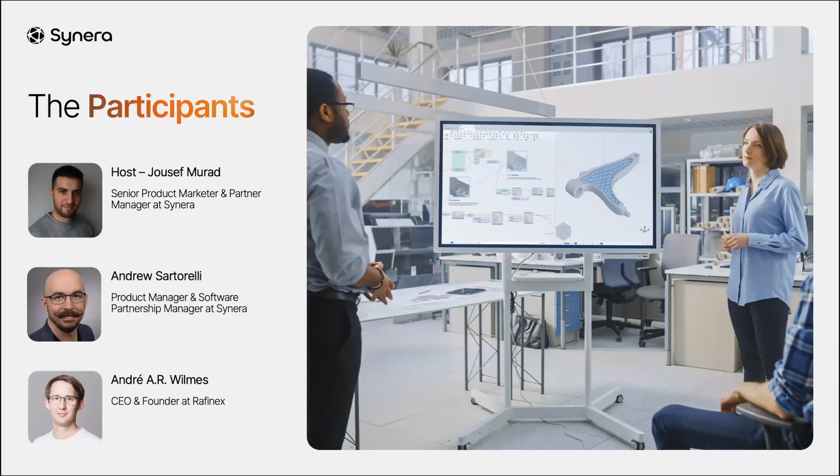All right, a little bit about Synera and how product development processes have been done in the past. So for hundreds of years, engineers focused on developing parts and accepted the fact that they need to invest their manual work and labor in form of money of the company in the development of every single part. And this happened repeatedly. With every new generation of a part, engineers start development again, basically from scratch. This was true in the past when we engineers used pencils to draw on papers, and this is still true today when engineers use, for example, CAD and FEM systems to digitally, quote unquote, draw or create a digital file. The tools evolved, however, the working principles did not.

In the future that we see with Synera, and even today, we see that engineers can and will stop developing the part and will start developing the process. This saves an enormous amount of resources because we engineers can recycle the process in case boundary conditions or other requirements change. Our vision is to focus on the connection between invested manual work and created value, which ultimately translates into ROI, such as saved time and money. Simply said, in our world, engineers accept the fact that they create things which drastically lose value over time, and at the same time, they accept the fact that mistakes are made more than once.

And that very moment when engineers start to create the process itself, they create value, which will survive over time. Even more, every time a new engineer opens a workflow in Synera and works on it, new ideas are added. Thus, more efficiency is added on top. Processes are stored, saved, and remain accessible to every new user of the workflow, which makes communication and collaboration much more accessible and seamless than ever before.

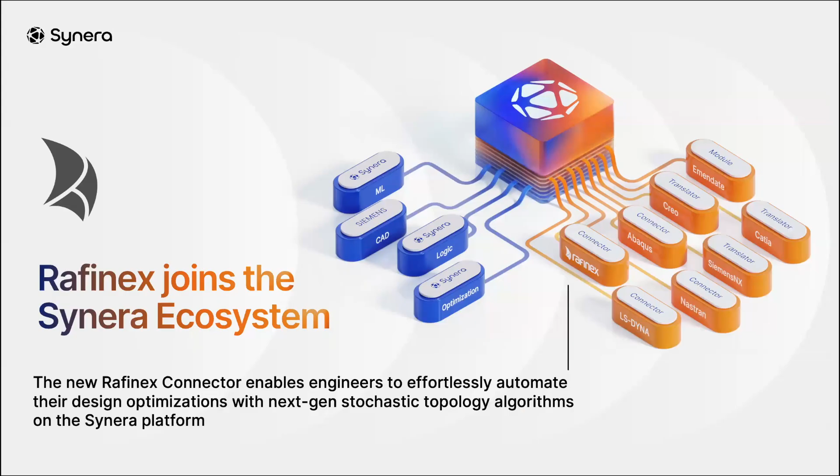Thanks, Jousef. One of the pleasures being the software partnership manager here at Synera is being able to announce the partnership between Synera and today Rafinex. There's been a lot of hard work on both sides going into creating this connection between our two softwares to really enable engineers to effortlessly automate their design and automation processes with the help of next generation stochastic topology optimization algorithms, thanks to Rafinex. I'm going to get a chance in a few minutes to share with everyone a quick demo of the workflow that's possible now thanks to this connection.

But first, I'm going to let Andre, the founder of Rafinex, share a bit about the strength of this technology and how it's solving problems in the automotive space today. Indeed, thanks, Andrew. I can only echo the pleasure it's been. Not only are we breaking ground here on CAE technology, but also on computer and software integration. So it's been quite a pleasure to work together.

Now, before we jump into the meat of things, a few words maybe on who Rafinex is. Some of you may have heard of us, some of you may not have so far. So Rafinex is really an algorithm development company that's specialized in advanced optimization algorithms with a core know-how in uncertainty quantification. So in and around how do we make CAE tools more realistic, more reflective of the real world, and also being able to compute business risk for the end users and the end customers.

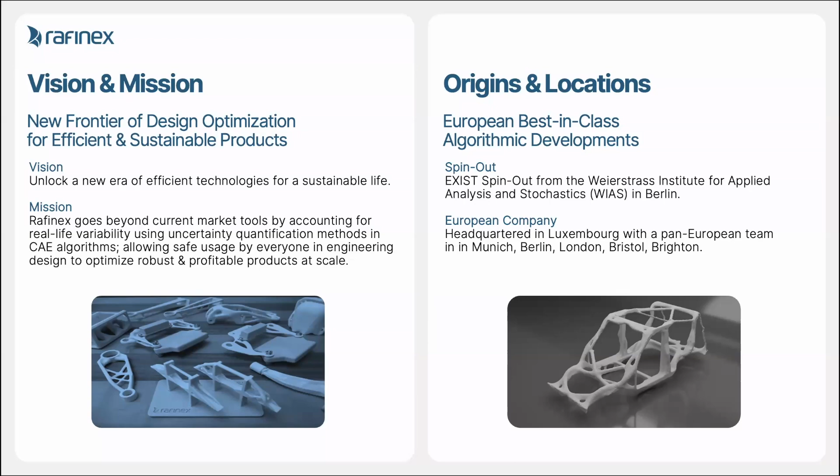So fundamentally, the problem Rafinex is tackling with stochastic or robust design optimization is over-engineering. The cost of bad design. People spend millions in process manufacturing, technology, quality control on materials, all of which are valid undertakings. But if the underlying design shape, which is locked in very early in a product's life cycle, is badly chosen, quite a substantial amount of money and cost is left on the table. Estimates vary, but somewhere around 70% of a product's life cycle costs are locked in during ideation phase already.

So the ability to optimize very, very early on, even sometimes when requirements are not fully known yet, and we'll get to that in a second, is really mission critical for the future of resource efficient engineering, particularly if business models are changing more and more to manufacturers actually owning the fleet of their products after they've been manufactured. And then suffice to say, with the recent energy and material cost problems and geopolitical implications, this problem has just become much, much more acute.

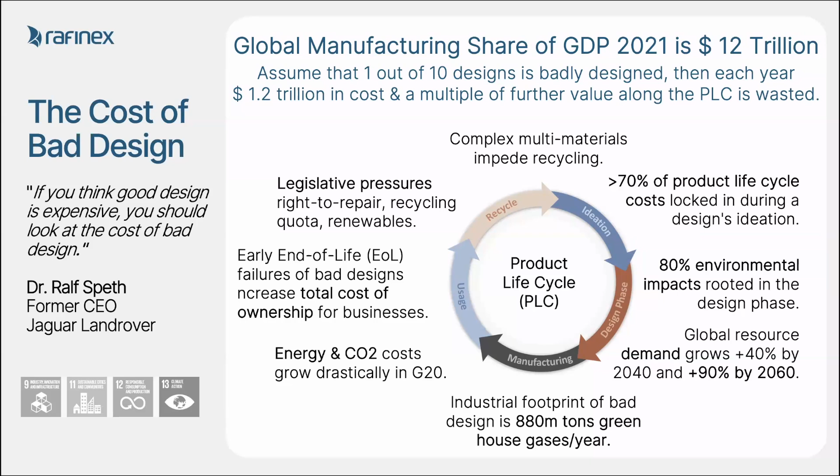So ultimately, design optimization is always a trade-off between time, money, and risk and cost. So design optimization was and has been possible in the past, but the question was always how much human resource time, compute resource time am I willing to invest, and what happens to my residual risk?

Now, what we have achieved at Rafinex is that we have taken classical topology optimization and we have augmented it with real-life data, also formally known as uncertainty quantification, which makes the algorithms slightly more complicated, just as an understatement, but which also brings in the fact that now you can optimize very swiftly for formally robust parts, which are optimal under nominal conditions, but retain a certain amount of performance, safety, and reliability under off-design conditions. So that is critically important for business end-to-end cost, go-to-market speed, and managing business risk associated with the rollout of your products.

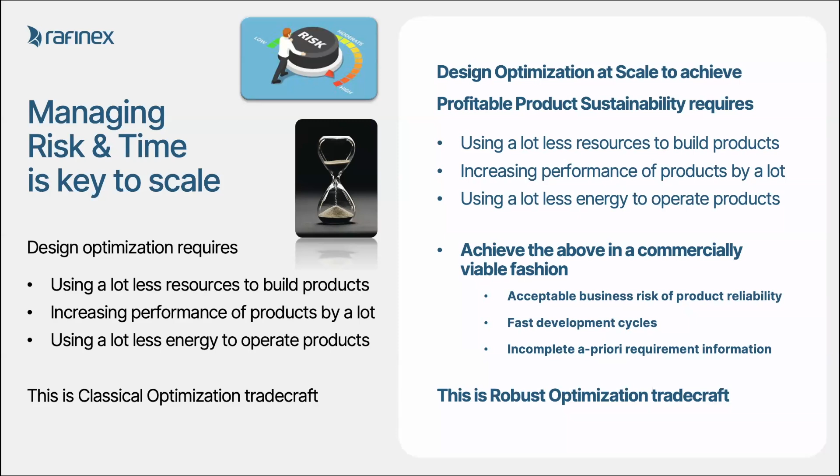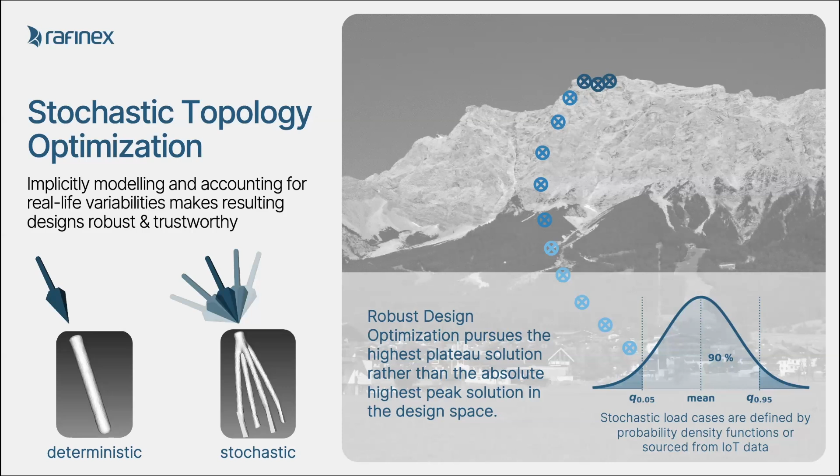For the specialists in the room, when we think about solution spaces, robust optimization aims to find the highest plateau in a solution space rather than the absolute highest peak in this mountain range. And again, the business implications are around safety and reliability of the product in service. So ultimately, this leads us under variability.

So if you optimize with variable input parameters, and these can be the loads, they can be the material properties, you find new shapes, formally robust shapes, which don't come spectacular, unfortunately. So we're not talking about coral reef looking geometries, but geometries where trained mechanical or aerospace engineers look at these parts and go, okay, ambitious, but sensible. I can understand how this part does its job.

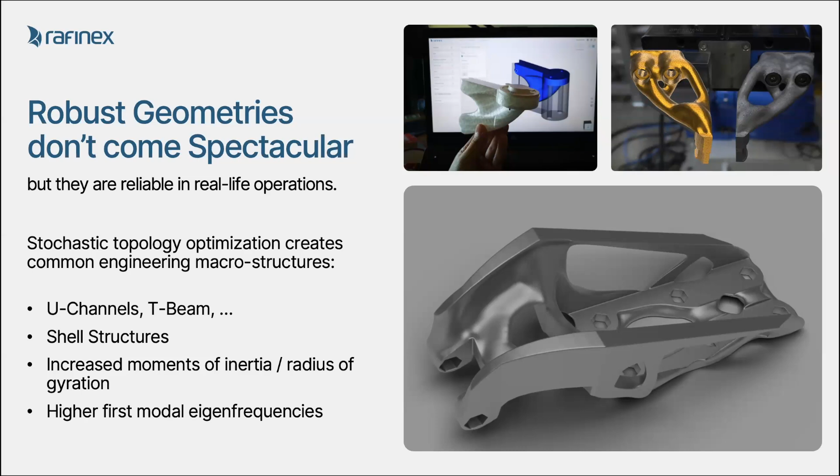So all the shapes that you see here today, none of them have been filtered, none of them have been smoothened. All of the geometries you see today are actual FEM computed and then manufactured parts. So common features in these robust geometries are U-channels, T-beams. Something that we're rather proud about is the occurrence of shell structures during topology optimization, which is rather rare with classical tools. And all of this results in geometries which typically have quite high modal frequencies and robust stiffness properties as well.

So just a word before we jump into the demo: the end-to-end workflow of the Rafinex technology starts really at the design space, so the maximum envelope that your geometry can sit in. As a first off, we do a fully automated TET10, so second order analysis on the design space. Why? It allows you to quickly learn about your problem setup, it shows you which are the worst load cases, what drives your problem setup, and it gives you the upper bounds of what is achievable. Because filling the design space with 100% material will give you the upper limit of what's achievable in terms of stiffness performance.

Subsequently, in the next step, we do a stochastic topology optimization with adaptive meshing on the fly, resulting in very high resolution, very well defined, and always continuous shapes. So we do not suffer from islands or satellite beam-looking structures sticking away. We always have a smooth surface, which we can then automatically post-process or hand over to, again, a TET10 second order stress analysis, so that we effectively get the engineer from design space to a reliable, formally robust geometry that is fully digitally validated, so that engineers can make quick, informed decisions on the basis of reliable FEA validation and analysis.

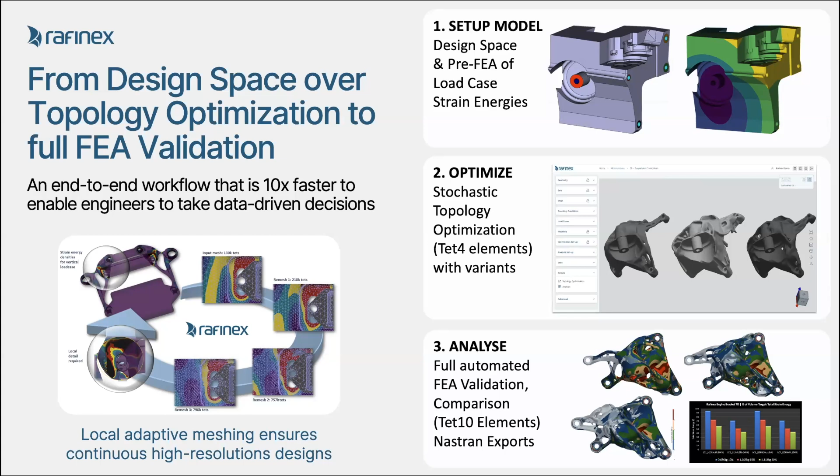So this is about 10 times faster in terms of workflow than most status quo implementations in the market. And most of this we owe to the usage of adaptive remeshing during optimization. So we've taken this technology, we spent a few years maturing it with automotive OEMs before even launching our product. So in about late 2021, we took this technology and built it into a fully fledged cloud-based CAE software tool that we labeled Möbius.

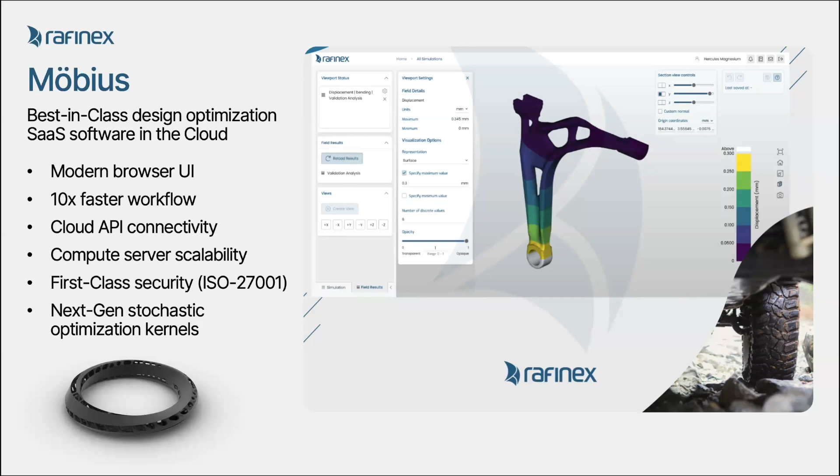So this is an API-based, cloud browser-based software that is fully secure with ISO 27001 certification, and it provides these capabilities for next-gen stochastic topology optimization to our customers, but now also to our partners such as Synera. Okay, that brings it to you, Andrew.

So it's my pleasure today to show everyone a bit of the Rafinex connector for Synera. One of the great things that we've done here is take a lot of the capabilities that exist within the Möbius product and make them accessible through Synera, directly using that cloud API to securely send all of the information between Synera and the Rafinex Möbius product.

Whether we're doing the automated optimization or design validation processes after the optimization, it's all possible now within the Synera platform. Coming soon is even the option to optimize using IoT data, thanks to our MQTT connector, which allows for sending this data back and forth, and of course the amazing stochastic loads are accessible through the Synera platform. So now I'm going to jump into Synera and give everyone a quick overview of what's possible.

So for those of you that haven't seen Synera before, here you can see the low-code environment. On the left-hand side, we have the canvas, which allows us to add and remove nodes and construct our workflows. And on the right-hand side, we have the viewport, which really enables you to interactively view those results from your visual programming workflows. In this case here, starting out on the left-hand side, we can actually see some of the new nodes that come thanks to the Rafinex add-in.

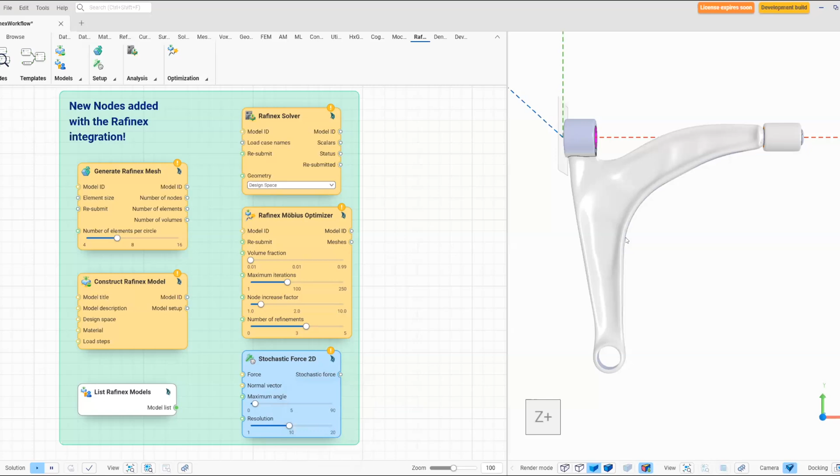But let's see this in action. So you can actually see on the right-hand side, I've got the part that I've already optimized here. We can see this nice structure, and let's see how we got there. So like most workflows inside Synera, this one starts out by importing some geometry. In this case, we're directly importing a parasolid file. Synera has access to a lot of the leading CAD kernels and translators there. So whatever CAD tool you're using, we're going to be able to bring in some of that geometry.

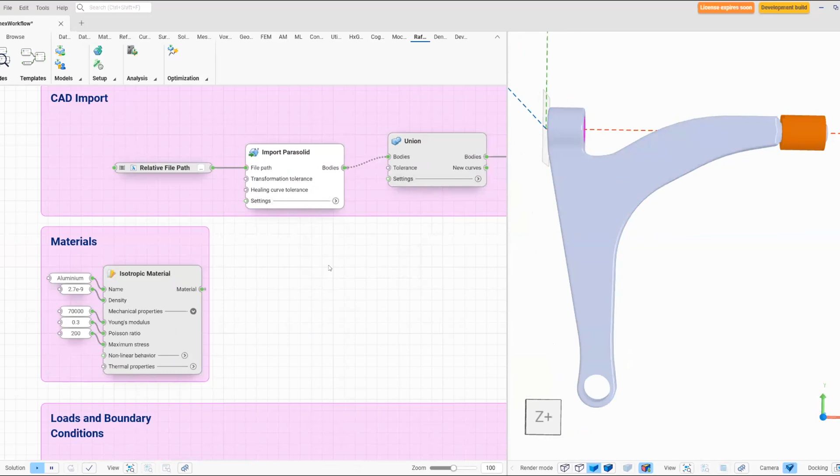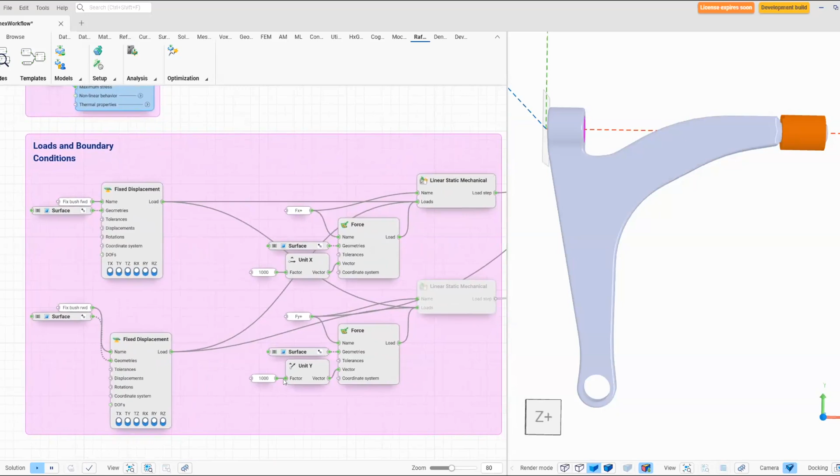I also need to bring in a few other items from outside tools. So we're going to, in this case, take in our isotropic material. We've just entered the values that we wanted here. And we also have some loads and boundary conditions that we've set up. Of course, doing an optimization process, doing finite element analysis, we need our loads and boundary conditions. And here you can see in the visual environment, we've set up some different loads that are going to be applied to our component here.

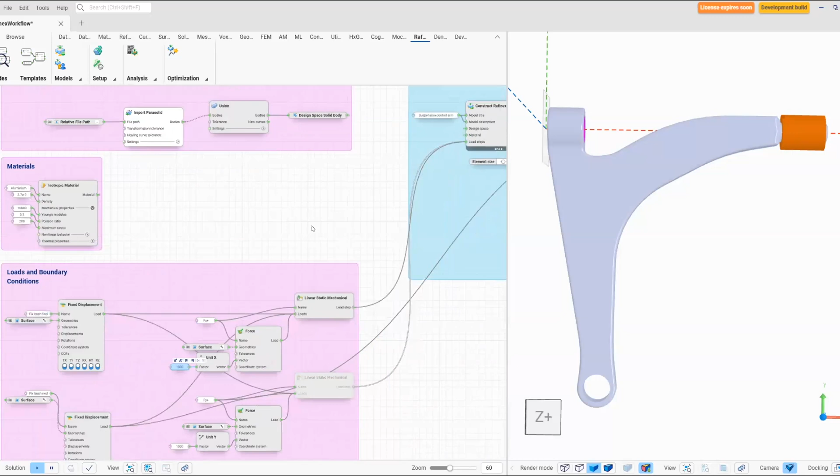Now, in this case, these are fixed loads that we've specified here, but in the future, you can imagine we can actually replace some of these inputs thanks to our connection to MQTT and read in some of that nice IoT data. Now, once we've set up our loads and boundary conditions, we're going to go ahead and start to construct our model. In this case, we can now see the model that's been uploaded to the Rafinex servers. We can see the different surfaces there where we've applied different loads and boundary conditions colorized differently.

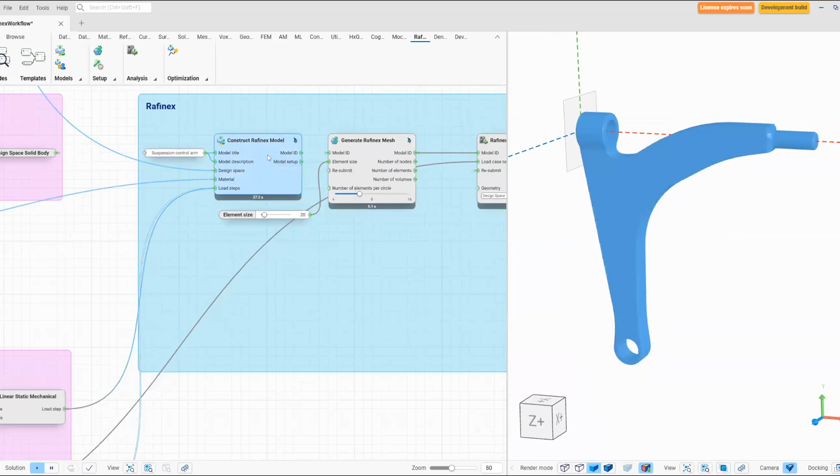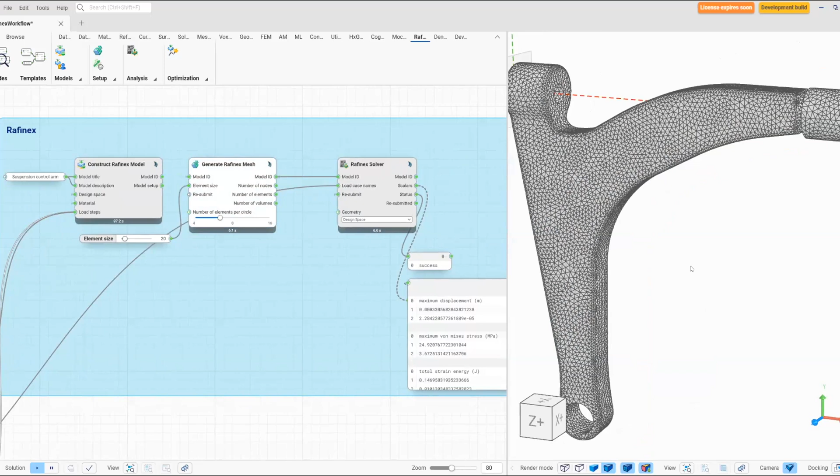The next step in any optimization or analysis process is going to be generating a mesh. So we can see here this really nice full tet mesh that we've generated, again, fully on the cloud without leaving Rafinex servers. And the first step in our process, before we even get to the stage of optimizing this part, we want to understand the performance of it to start with. And so we're going to take advantage of that built-in validation solver where we've selected, okay, we're going to run this analysis on our initial design space.

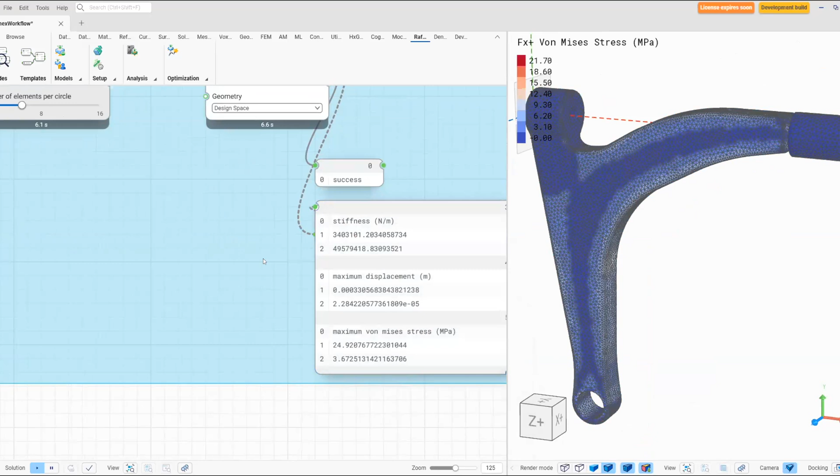You can see we get out some information about the maximum displacement, von Mises stress. We could even scroll up a little bit here and see the stiffness of the part for different load cases. It's going to be really useful when we go back and look at the optimized part and want to compare the results that we've generated.

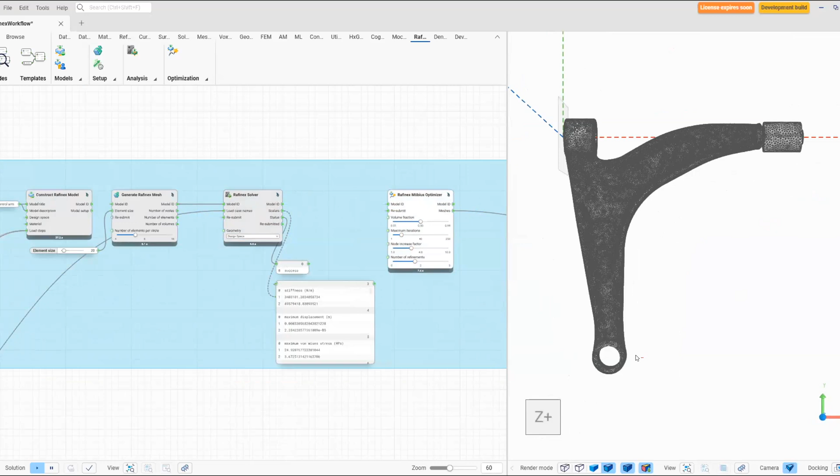So the next step in the process is we're going to actually run the optimization. And now we can see this nice geometry that we've got back, really smooth results. I have to say, I've been working in the engineering software space for a while, and these are really nice results coming out of topology optimization here. So kudos to Andre and team.

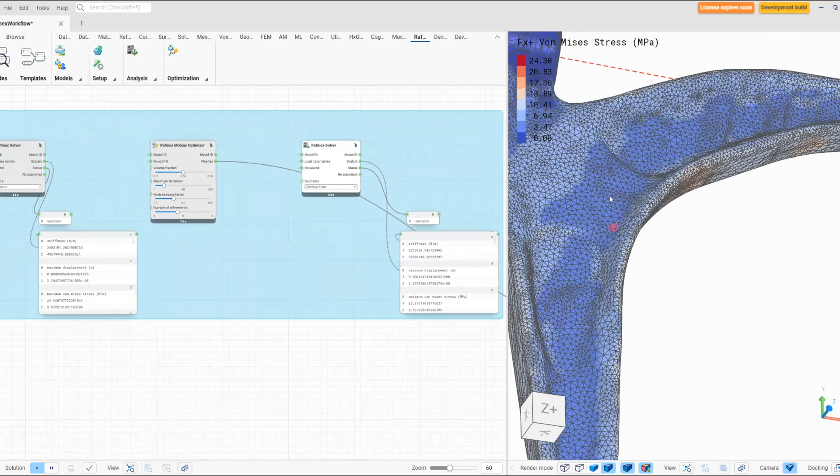And of course, the next step here is going to be validating this geometry after we've optimized it. Now we can see the validated geometry. We've gone ahead and run a post-optimization validation here on this using the loads and boundary conditions that we'd already specified.

A really nice feature of the Rafinex solver here. And again, results stream back directly into Synera. But again, I said the nice thing here is we can actually go ahead and take a look and compare our stiffnesses before and after, thanks to this nice addition here. So we can see actually stiffness reduced in both of our load cases, but also a little bit difference on the maximum displacements here. So really a nice optimization done by Rafinex.

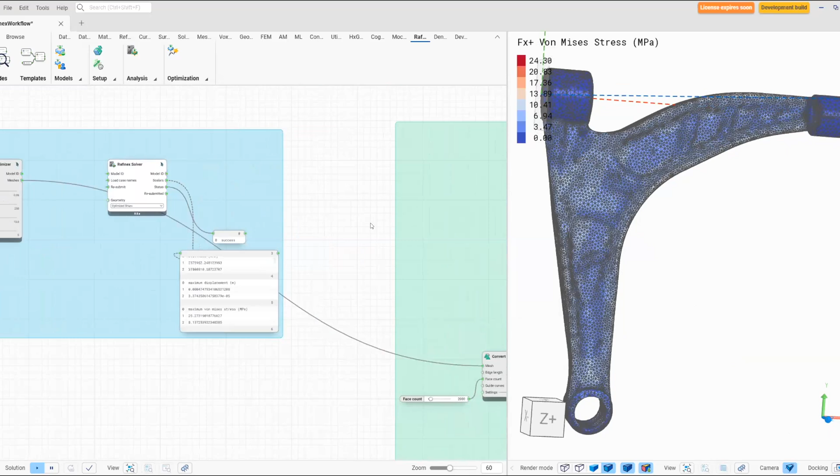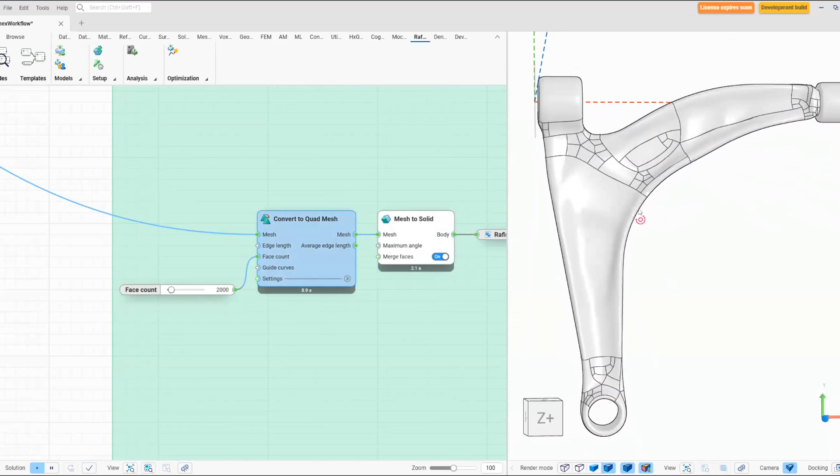Of course, once we go ahead and optimize this part, most workflows we're going to have to go ahead and actually turn this back into CAD geometry. And this is really where Synera comes into play, where we can generate a quad mesh of our part using some of the built-in algorithms for Synera. And then we're going to actually convert that quad mesh into a nice BREP geometry. Because we do have the Parasolid kernel inside Synera, we're able to do those nice BREP operations. We're going to do some Booleans to actually end up with our final geometry here.

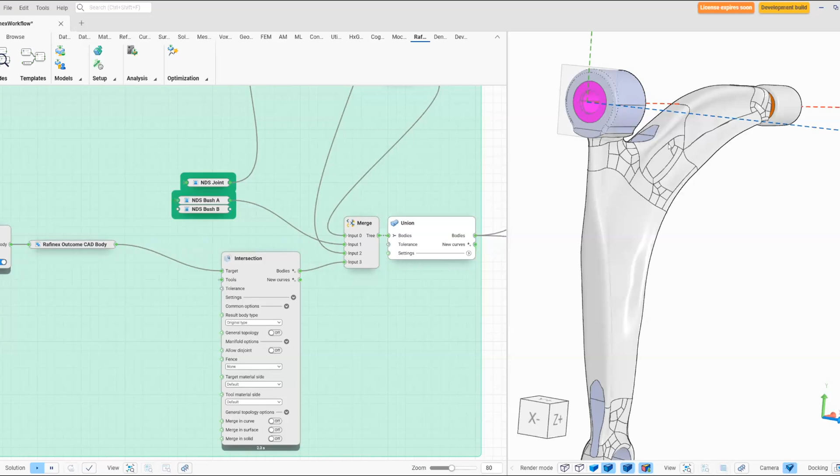And we can see we've actually been able to add back in some of those functional faces, functional surfaces that we're going to need for mating and other things. Maybe if we're doing a further multi-body simulation with this part in, we're going to need to mate those surfaces in for those contacts.

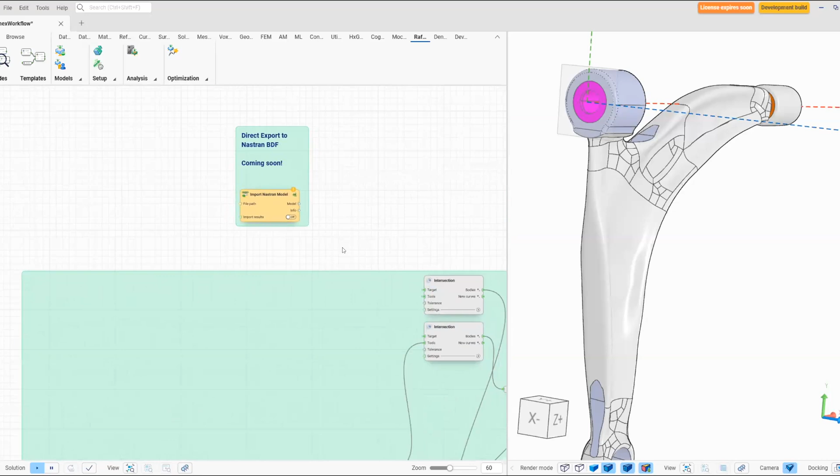Now, I've been told coming in the future here is actually going to be a direct link to export your Nastran bulk data file from Rafinex. So when we want to take this into a validation actually inside Synera, pretty soon we'll have that direct connection there to make it even easier, whether you're using Autodesk Nastran, NX Nastran, or MSC Nastran.

So now once we've got this geometry, we've got a few different things that we can do here. As I said, we could do a further finite element analysis, or we're going to jump down here and actually we're going to take a look and we're going to mesh this part and use one of the add-ins from another one of our partners, Fraunhofer IAPT, to do a costing analysis on this part.

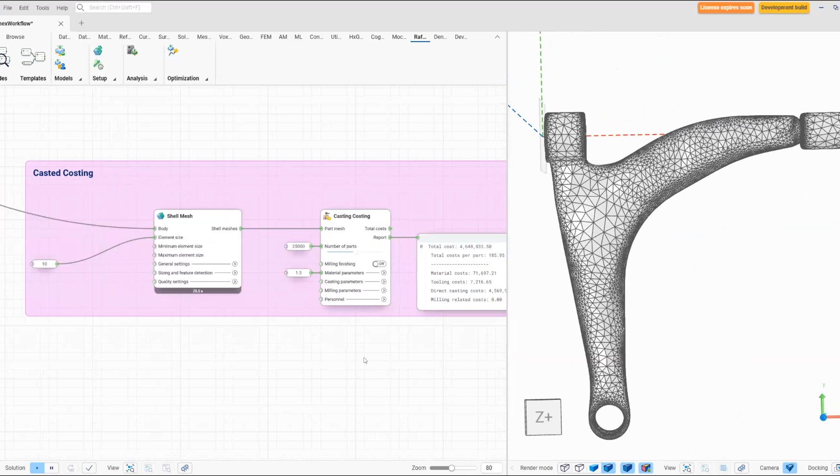So because this is a cast geometry, we can go in and say, okay, we want to have this many parts in our batch, and we're going to specify a few different material parameters where you can specify the price of the material, the density, so on. It really gets quite elaborate here, but in the end, we can actually see what is a projected cost.

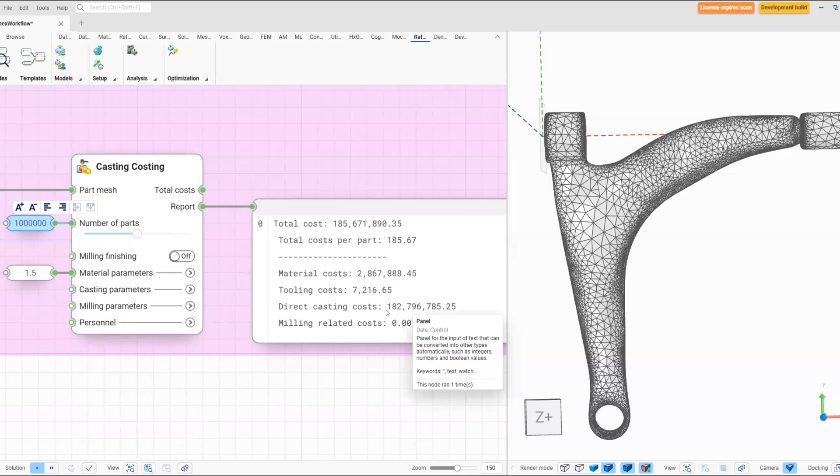So maybe if I'm going to go ahead and turn this into, I don't know, we're actually going to go into really high serialized production. We can see the total cost for this, and again, the unit price there and different costs for various aspects of the manufacturing operation. A really nice thing to kind of complete the workflow, not just optimizing for performance, but also optimizing for costs.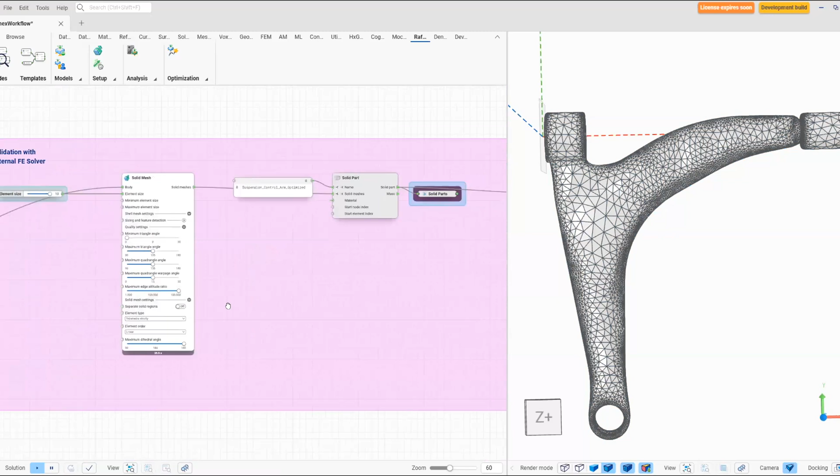And again, the other step we could take here, if we wanted to, going ahead and generating an FE mesh that we'll use for running this analysis. I'm not going to go into too much detail here, but again, the nice part about Synera is we really give you a lot of options. So once you construct that workflow, you have the option to use whatever solver that you want.

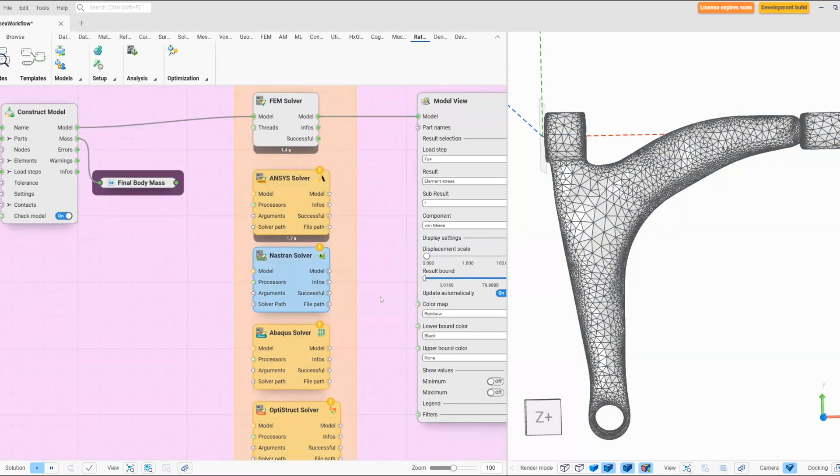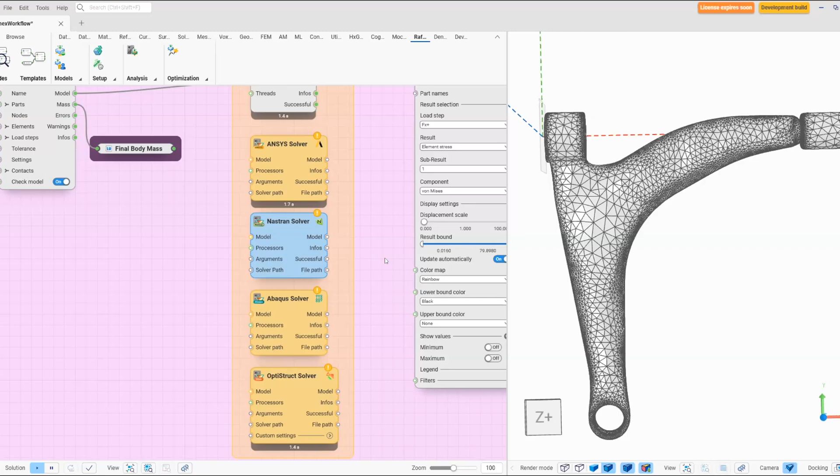So whether you're doing a nonlinear analysis or linear analysis, you can simply plug in, if you're an ANSYS user, if you're a Nastran user, whatever flavor of Nastran you're most comfortable with, Abaqus, OptiStruct. We have options there for all of them to really allow you to tailor this workflow to your needs, or maybe the needs of the partner that you're working with, or the company that you're doing a contract for, so that you don't need to recreate your entire process from scratch just because you're switching solvers around.

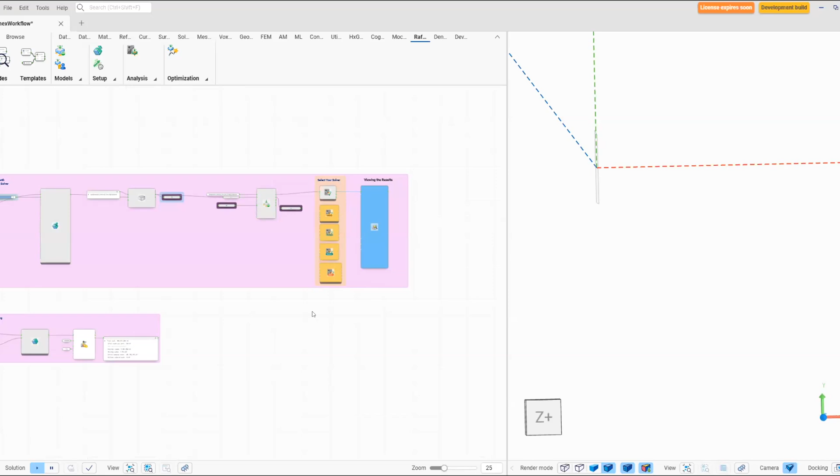And again, in the end, we end up with this nice optimized geometry, and we can simply take a look at the results in the viewport here. So that really concludes the quick demo of the new edition of Rafinex Mobius optimization technology connected inside Synera, as well as the Synera platform. And now I'm going to hand it back to Andre.

Yeah, thanks, Andrew, for the very good overview. So yeah, I'm very excited to be able to provide our technology in like a full end-to-end data information environment, let's say, of OEM customers, and provide it in even further extended workflows.